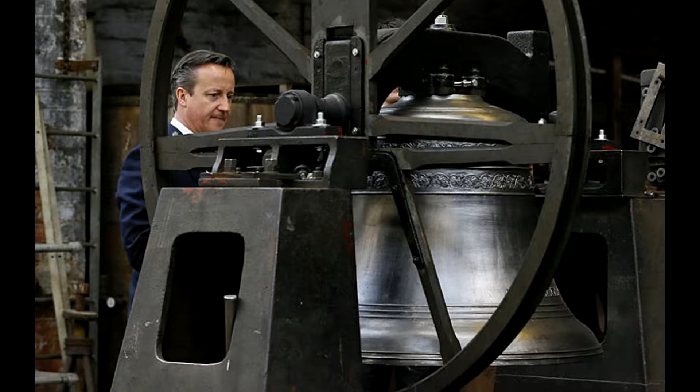Today's subject is going to be how to make a bell, how to ram up and cast a bell. There's many ways to do it, but in the Navy we usually only did it just a couple of ways. It depended on what kind of bell it was, how big it was, and so forth and so on. But today, I can think of maybe 5 ways of making a bell, but 2 of them are the ones I'm going to cover now.

Here's your basic bell. Now this I got over at a thrift store, and I think it's from India or Pakistan. Made in India. Yep. And it sounds real nice. This is made out of brass, obviously. If you can see, it's much more yellow than it is red. If it was more reddish tinted, it'd be a bronze. And that's how you can tell it, more or less.

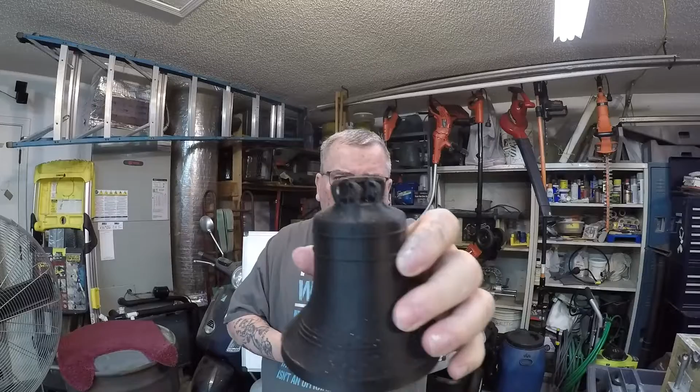Okay, here is a copy that I made on my 3D printer. I'm going to make one of these also. So the thing is, when you're ramming them up, you can see the top, you've got a bunch of holes in there. That won't be reproduced when you ram it up, because unless you had a core specifically made to copy this portion, the hanging portion, you're just going to have to fill that in and then drill out those holes later and make it look nice.

Anyway, you've got several different types of metal over the centuries that bells have been made of. They made them out of copper. Didn't sound too good, but that was the material they had at the time, so they lived with it. They finally learned how to make bronze. Those made the bells sound much nicer then.

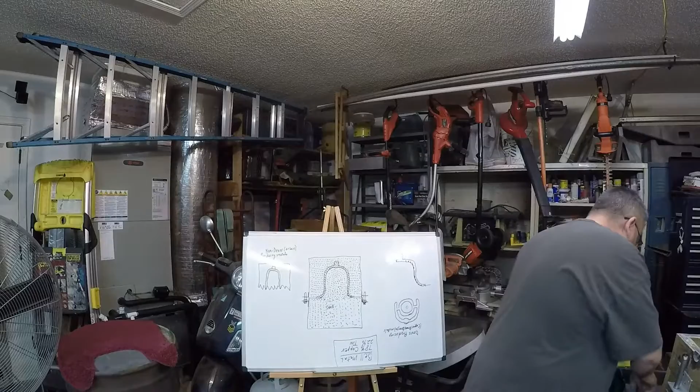Matter of fact, our ancestors really seriously thought that the sound, pardon me for a second, the sound coming out of a bell was the songs of angels or spirits trying to talk to us. There was nothing else in their life that sounded like that. It was beautiful. It calmed people down when they heard it. They used it in a lot of religious ceremonies. The Chinese used them to scare away evil spirits because it was a sacred sound, and they thought the evil spirits couldn't stand it.

Our ancestors in Europe and Great Britain used it as part of their religious ceremonies to mark the time. It was like them saying, "Everybody come on in, we're going to have a ceremony." That reminded everybody that was busy that when they heard the bell, it was time to go to the church. So there were many reasons for having a bell in the old days. Nowadays, they're basically nothing more than ceremonial. Not ceremonial, but good looking, and they sound good at your homes.

On the ships, we used those as a signaling device, like when the captain was coming on board. There were signals for every rank, but the captain, he was an actual captain. For coming on board the ship, it would be rung, and then we would announce who he is. On my last ship, the USS Yosemite, the captain was totally equated to the ship itself, and we would announce Yosemite arriving. That's what we used them for on the ship.

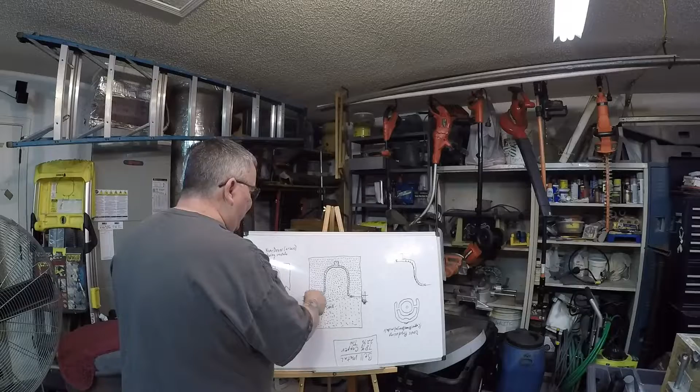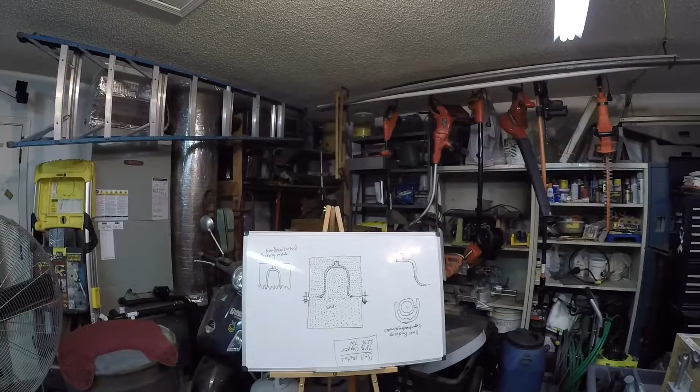It's going to come down and hit the top of this green sand core and tumble down this and hit down here at the bottom and splash backwards, and you're going to have dross being manufactured. Now let me double check and make sure that this is pointed correctly. Okay, that's a little better, I think.

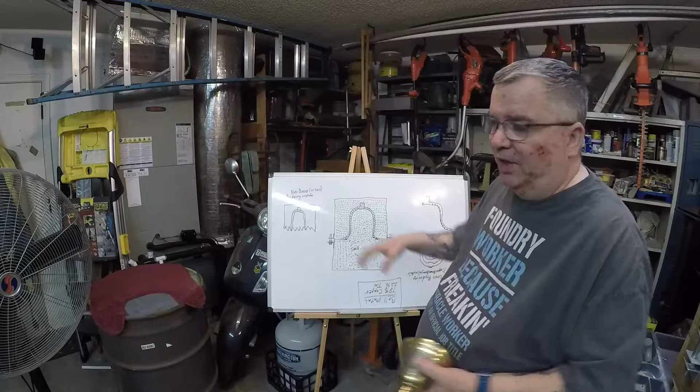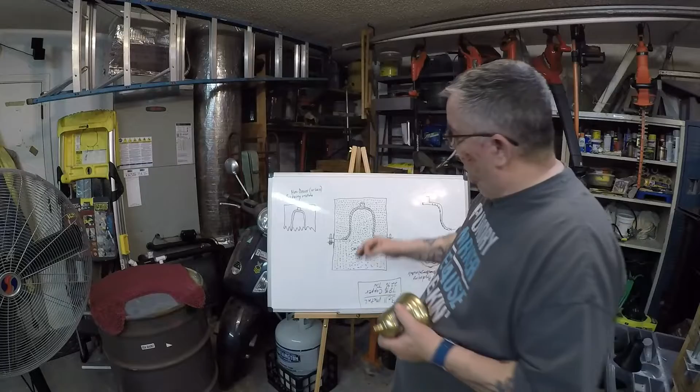Now I've got this set up to where when I'm done talking about the one metal, I can turn it over and talk about the other metal. This is the way I would ram it up if I was using non-dross producing metals. Well, I say non; there's always a chance some of it's going to produce some kind of dross, but it's less likely. Iron and aluminum in this case, you would have this.

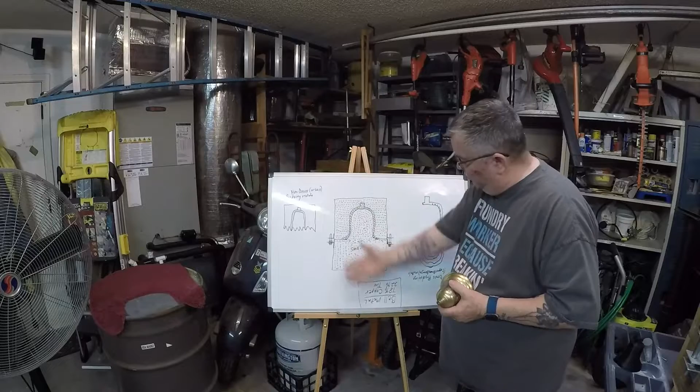By the way, this is a half view. This is the drag. This is the cope. Here's the alignment pins, and the sprue hasn't been cut yet. So over here represents the sprue being cut. It would go right into this portion here, actually one of the thicker parts of it, because it'll hold the bell in place.

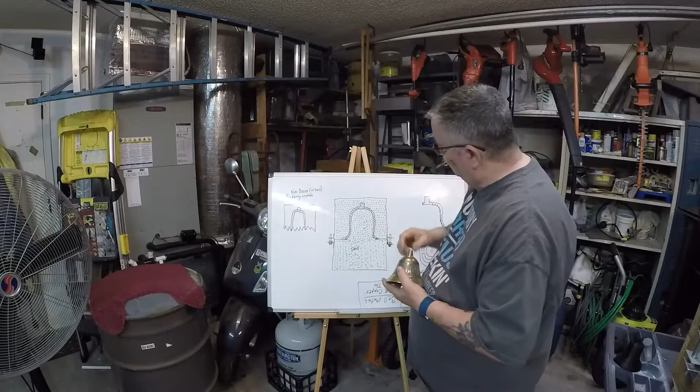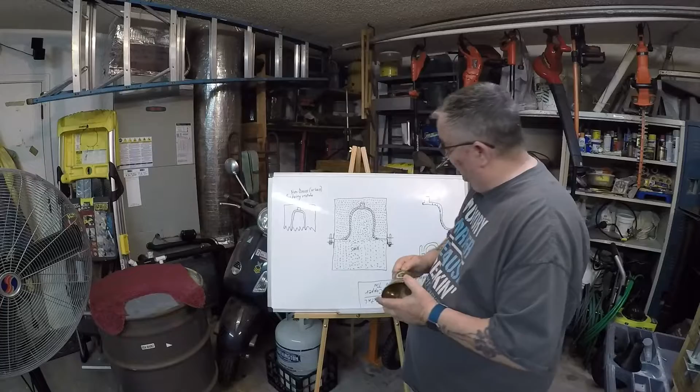It hits the top of this, it rolls down and fills up and goes back up, and you've got a solid bell. The odds are very good you're not going to have a whole lot of dross, or you've got to watch out for it, but you can always do it over again anyway. So I would just cut an opening right here on top and pour straight down in there, and you can make the assumption that you're not very likely to have any dross in your bell.

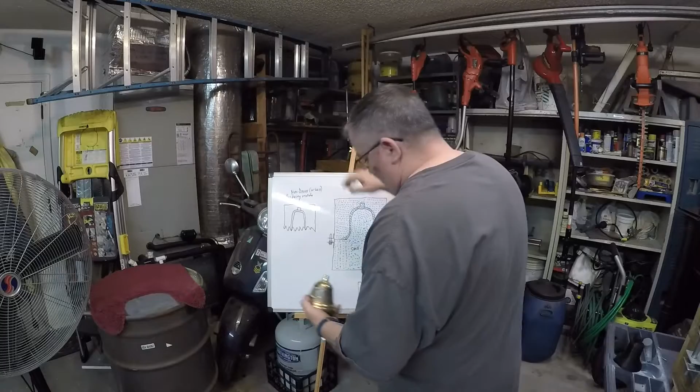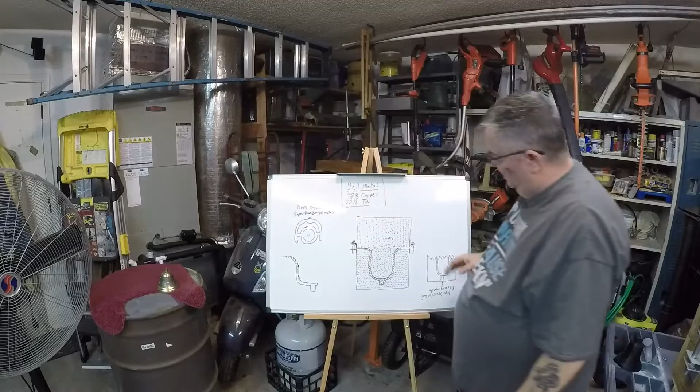Now, the opposite is brass and bronze. Pardon my back. Okay, I turn this over to show you. Now this is the way we usually had it in the Navy. We would have the green sand core hanging, so we would always have to have some supports in here, like gaggers and soldiers and other supports that would hold this green sand core from falling, because all you've got is just this one little area holding.

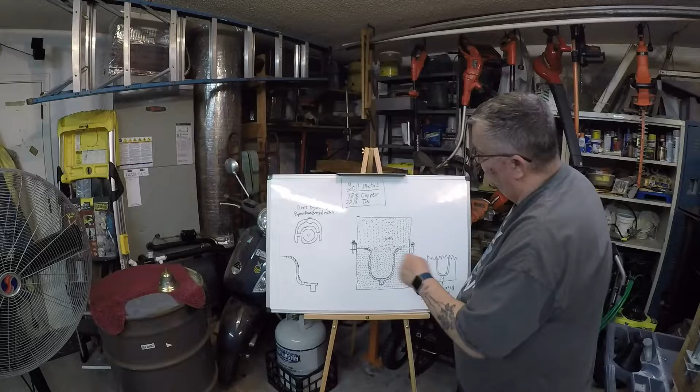All this other stuff up here doesn't mean a thing, because right here is where it would crack off and fall in there, and it would ruin the whole mold. So you put in a bunch of mold supports. I wish I brought the whiteboard, not crayon, but drawing pencil.

Anyway, you would have to have like an L-shaped gagger go all the way up to the top and do another L shape, so that it would be sitting on the edge of your flask, and the flask itself would be holding the gagger in place. Very infrequently did we ever have any green sand cores fall out. It happened, but it just taught us more about how to make the mold supports and why they're actually needed.

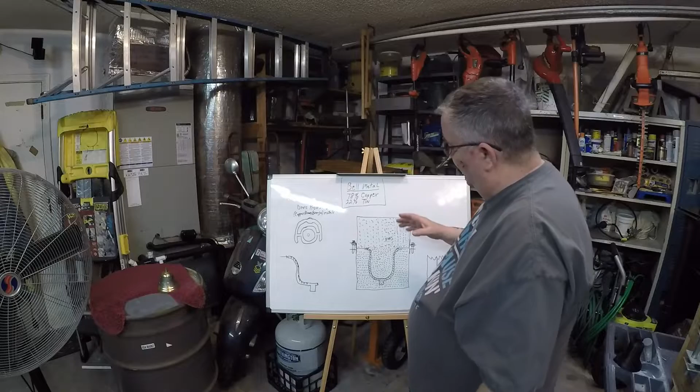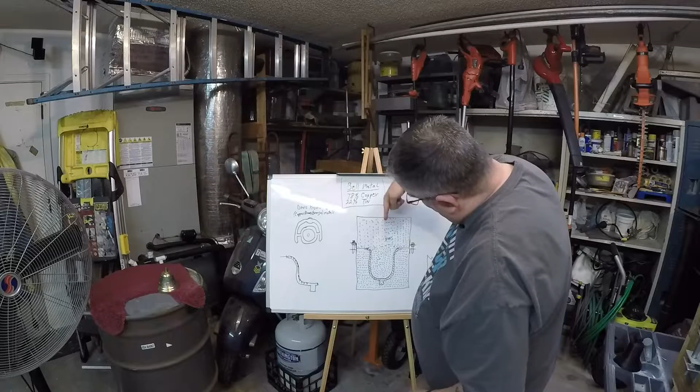Now this is basically the way it was set up, and these pins would be opposite. The way we feed these: let's pretend we just took the cope off out of the way, and now we have to cut the splash basin and runner and ingates. This is what it would look like. Here's your green sand core. This is the mold cavity that the metal would be pouring into, and ingates, runners, splash basin.

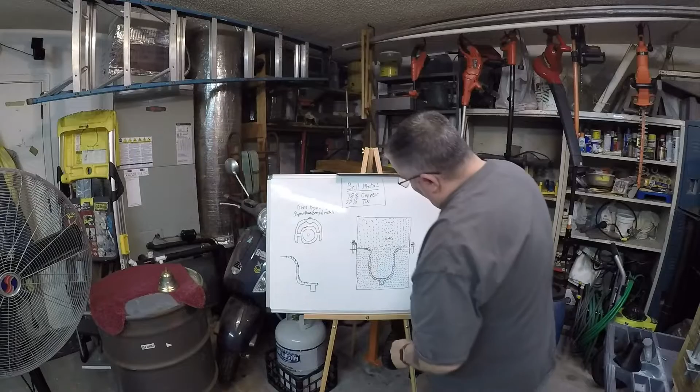Come in, fill up, flow all the way to the end. Any dross at that point is being pushed to the end over here. That's what this extra runner is for: if there's any sand or dross captured in this flow, it'll be pushed all the way to the end and not go into your mold cavity. Once these fill up and pressurize, the ingates would be filled up, and then the metal would be flowing down to the bottom, and it would fill back up.

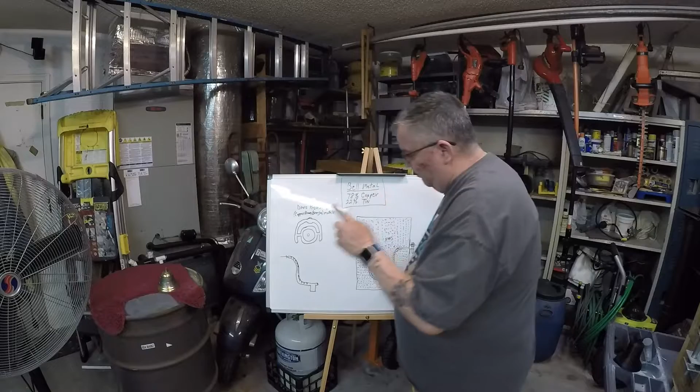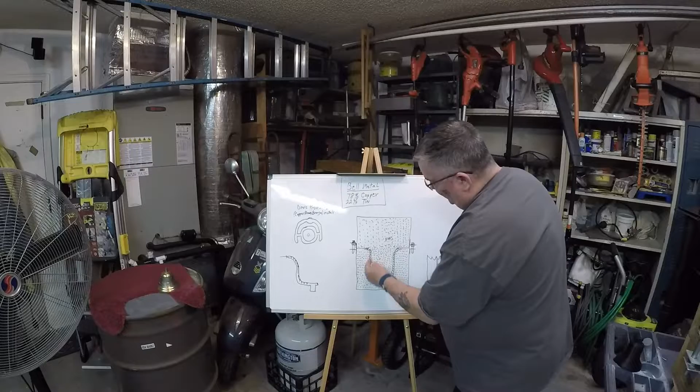See these little arrows right here? That represents the dross being displaced by the heavier, more pure metal, and being pressed and pushed against the green sand core. The dross would be captured against the inside of the bell and not be seen on the outside of the bell. It doesn't hurt anything if there's a little bit of dross on the inside of the bell, because the inside of the bell can be machined out just a little bit, and it would improve the sound.

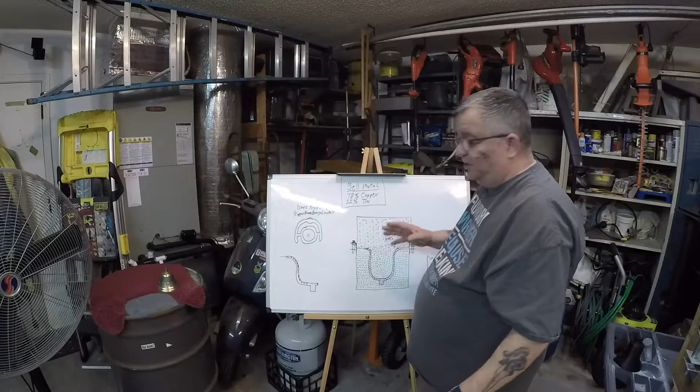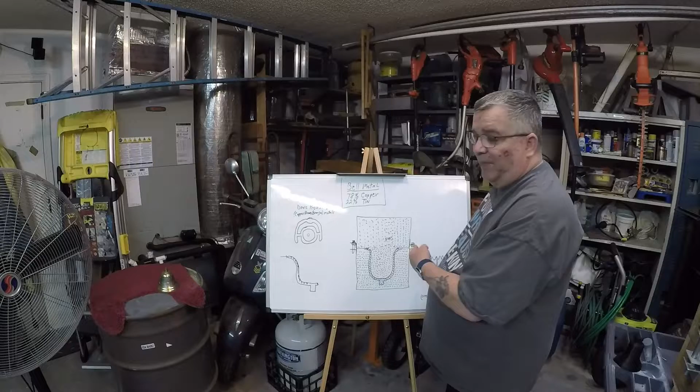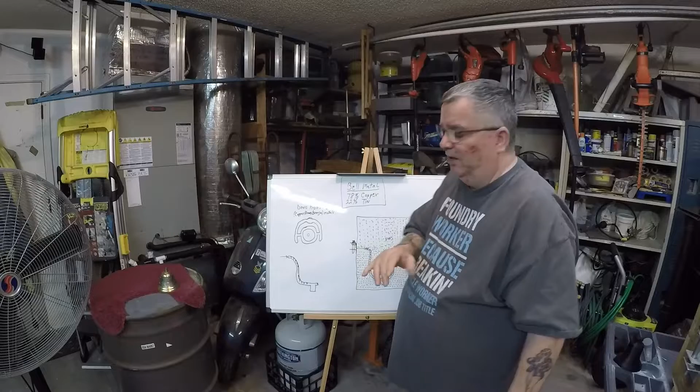Okay, so you got two ways that you can do it. The ways we did it depended on the material, and our material was almost always copper-based material, copper alloy, brass or bronze, depending on what the people who ordered the bell wanted. And for those of you who want to make actual bells with the traditional alloy called bell metal, here it is. Bell metal, 78% copper, 22% tin.

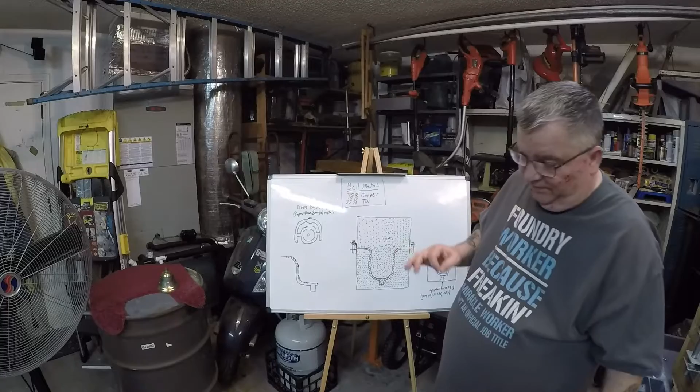It has been found over the centuries that that combination makes the cleanest, most beautiful sounding bell that they've ever found. Over the centuries the molders and the furnace operators would experiment and try to find out which combinations of elements would make it the best. And they found out that this was the best, and that's what they settled on. As far as I've ever read, they've never changed that. So this is a bronze alloy.

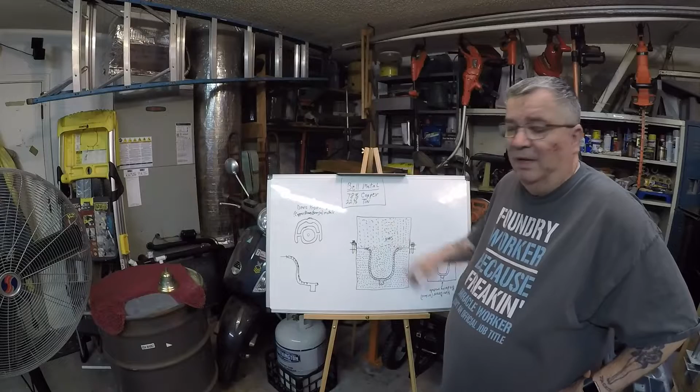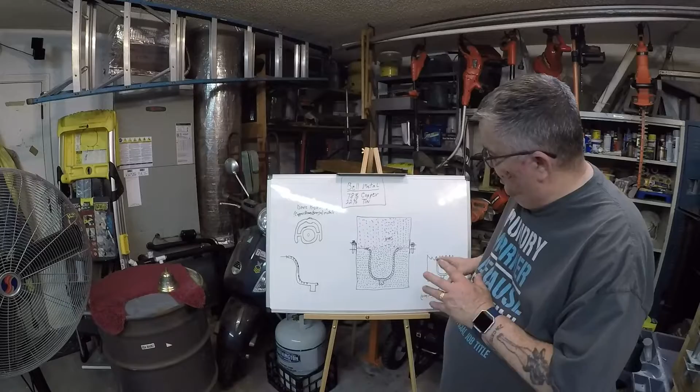If you're making a bell out of brass, which is a copper and zinc alloy, you're doing it not so much because of the sound, but because you can make it a bright golden color if you machine it and then buff it out. It's much more attractive, but it doesn't have that same beautiful tone as this. And that's basically the explanation of that.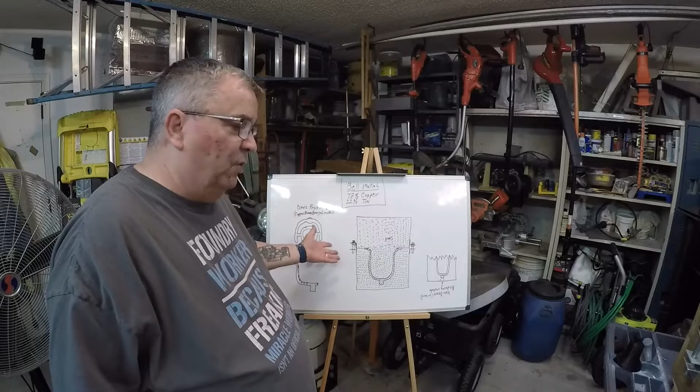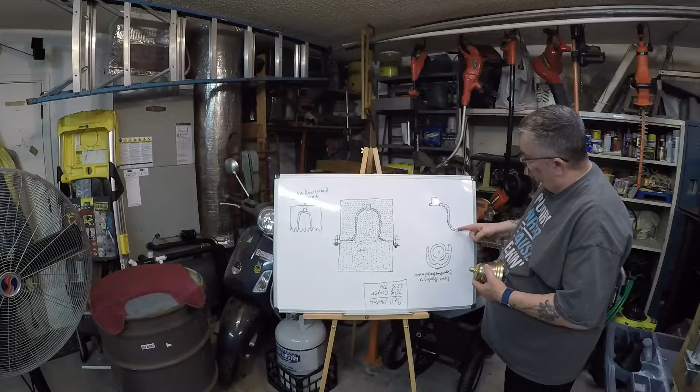Now, as I said, there are at least five different ways you can make bells. You got those two ways. Let me turn this back over. You've got a way of making it with what's called a sweep, and that's basically the shape of the sweep right here. Let's say this is made out of sheet metal. It's got to be stiff enough to where it can work its way through the sand or whatever molding medium you're going to be using.

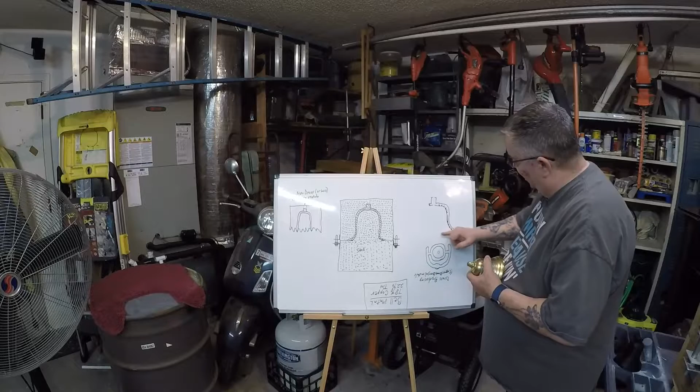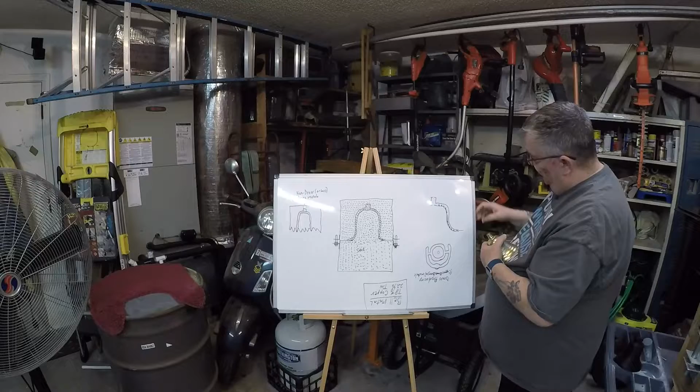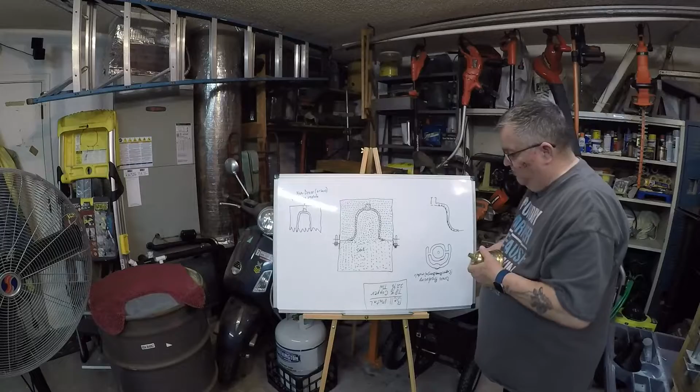There would be a long rod going to the bottom board, and you would make a big pile of sand here. The sweep would be put on top of the rod and shoved down into that pile. You would put a nut on top of the rod to hold this in place. And then using the sweep, you go slowly round and round until the sand that's not supposed to be there would be carved away.

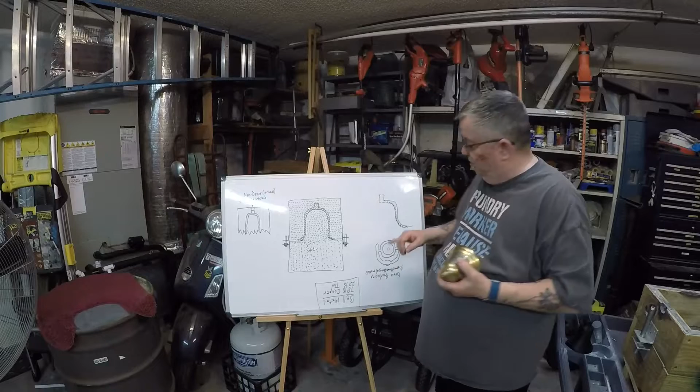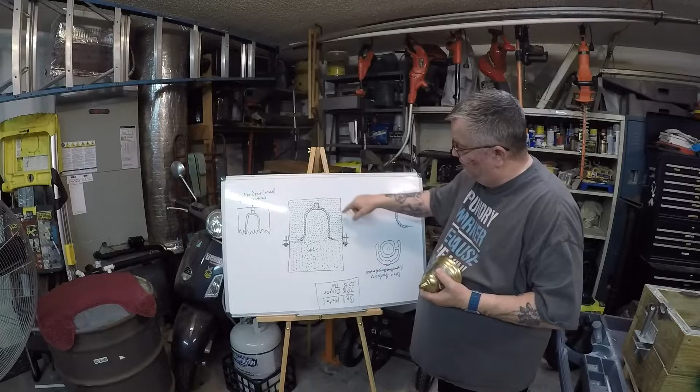For the drag, you'll be carving away, and you'll be forming the green sand core, the core for the inside of the bell. Now you ram up this part of the mold, and you use the sweep to form the outside edge. This is what this edge represents.

Now there's another way of making it. You can make one out of wax, make it very decorative, and then use the lost wax method to form the outside of the bell. You couldn't use that for the inside of the bell because the core has got to be collapsible.

When this solidifies, it's going to come in like that, right? It's not going to expand, it's going to contract. And it'll contract evenly over the green sand core, and this green sand core has got to be crushable.

Otherwise, you're going to have what our most famous bell, the Liberty Bell, has. You're going to have a crack in it. Okay, and I think looking at it from a molder's perspective, whatever they used to make the inside of the bell, they didn't make it collapsible enough. So that

history says that the first time they used the bell, they tried to use the clapper on the inside of the bell to make the tone. It immediately popped, and there was a crack right in there. That tells me that, yeah, the metal solidified, the very first skin of it solidified, but they had a lot of stress in there, and the first time they hit it with any vibration, the stress showed up at that crack point and just opened up.

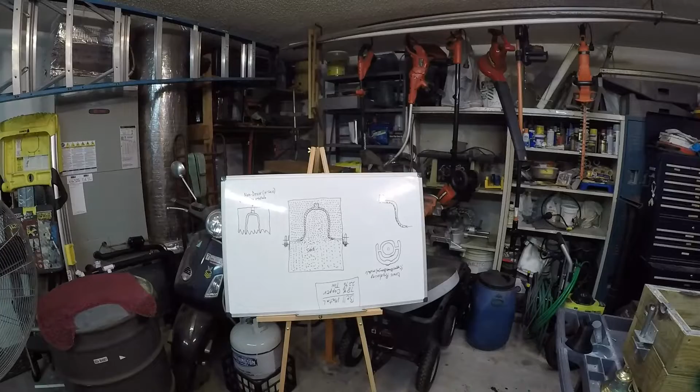Anyway, back to this. Okay, now I have changed my flask a little bit. It looks a lot more like what we had in the foundry on board the ships. Now, if you remember what I had before, I had a couple of pieces of wood here that I angled in slightly to make a wedge shape, and then I put another piece here so that when I set this down, the one piece up here would go in between those two down here, and it would line up and it would close. Okay, that was fine, except the stupid things were not made real well. Okay, I made them, I know.

But thankfully, I was watching Tobho Mott's website. Oh my gosh. One moment. Easier just to turn it off.

So, I like to watch a lot of the guys who do their own foundry work, and ever so often they show me a better way of doing things. Tobho, now it's not very easy to pronounce, Tobho Mott, okay, showed me a way of making alignment pins that I hadn't thought of before. Basically what you do is you get yourself, this is a 5/8 inch bolt, and the neck of it was this long, and there's my threads. On top here you had the head of the bolt, right?

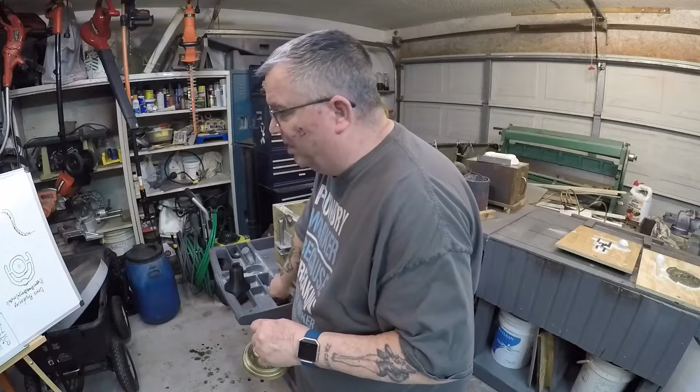Anyway, so I guess that's the basic subject of making a bell. I will be ramming up. I'm going to try this one and this one. There's plenty of room in here to put two of them side by side, so the odds are good that I'm going to be doing that. What my intention is with these different shapes and sizes of the bells is that I'm going to make wind chimes. They sound real good. I've had some aluminum bell, and it sounded good to me. And part of my problem is to try and arrange these where the wind will bring them together

and do that. Okay, so now it's a matter of me putting my furnace together and seeing if the technique that old foundry man uses for his furnace works in mine. Heck, if it works for him, it should work for me. I got to test that though before I can show you me pouring the molds. So this is going to be kind of a short video. I just wanted to let everybody know I haven't passed on yet, although I am 66 now. You can't plan that far ahead. So I'll be making these molds and pouring them after I test my arrangement in the furnace, and we cross our fingers everything will go good.

Okay, so everybody who's previously in the Navy, I was reminded that I had forgotten to give a Liberty call. Clean up your shops, take out your trash, and then you can go and get dressed for Liberty. And I told them I was going to say it twice, so Liberty call again.